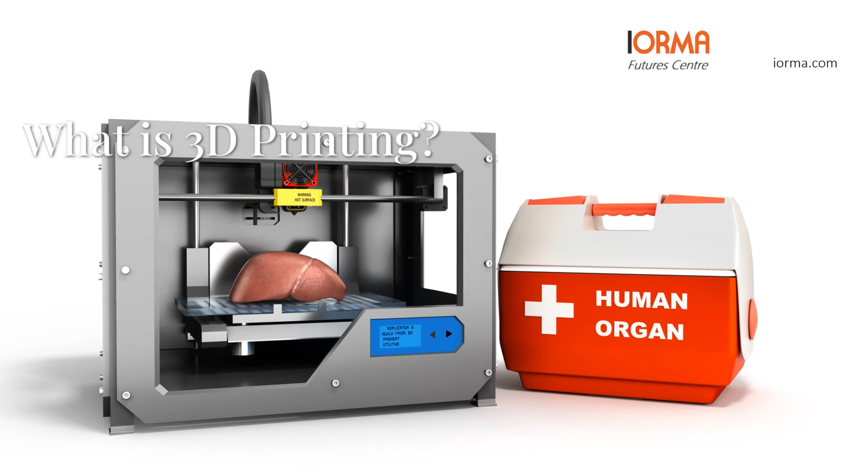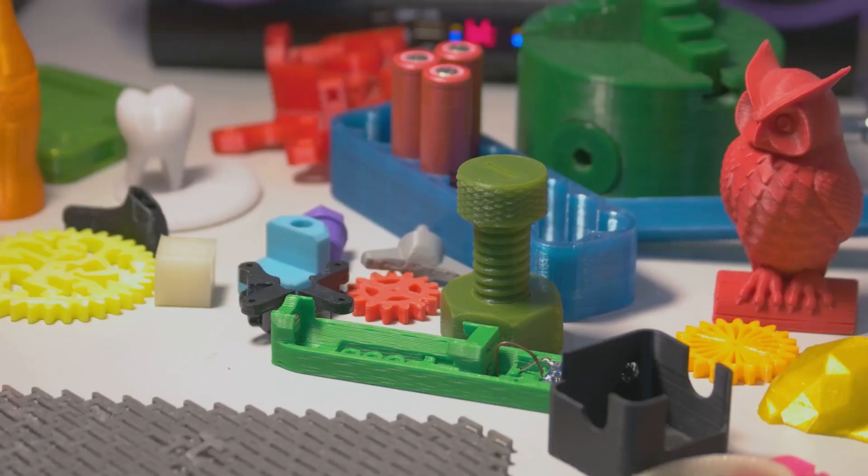Imagine a world where organs are printed on demand, homes are built in days, and astronauts on Mars create their own tools, all thanks to 3D printing. This is not science fiction. 3D printing, or additive manufacturing, is revolutionizing how we make things. Instead of carving objects from blocks, we now build them layer by layer from digital blueprints, reducing waste and unlocking new possibilities. From jet engines to custom shoes, 3D printing is localizing, personalizing, and streamlining production. The power to create is shifting to designers, engineers, doctors, and you. Let's explore how this technology is reshaping industries, economies, and our future.

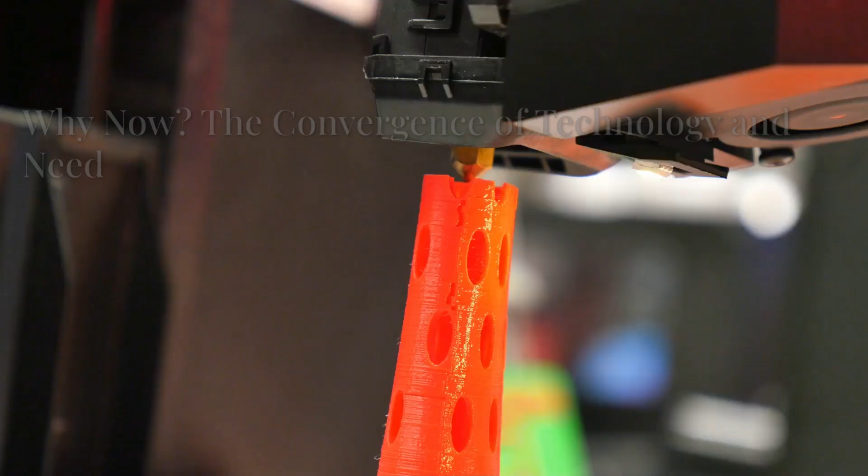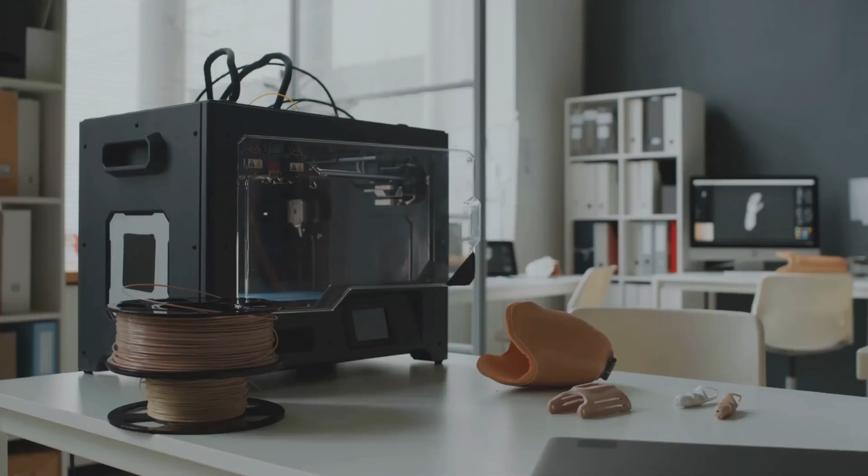3D printing works like a regular printer, but instead of ink on paper, it stacks layers to form solid objects. It starts with a digital design, a CAD file, sliced into thin layers by software. The printer then deposits or solidifies material, building the object from the ground up. Unlike traditional manufacturing, complexity doesn't add cost or time. Materials range from plastics and metals to ceramics and even living cells. This flexibility means 3D printing can tackle challenges across industries. Turning digital ideas into real objects is now just a click away.

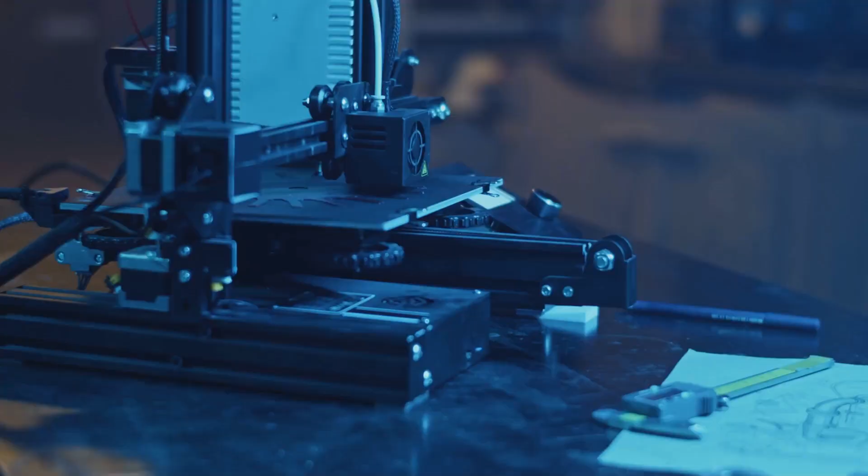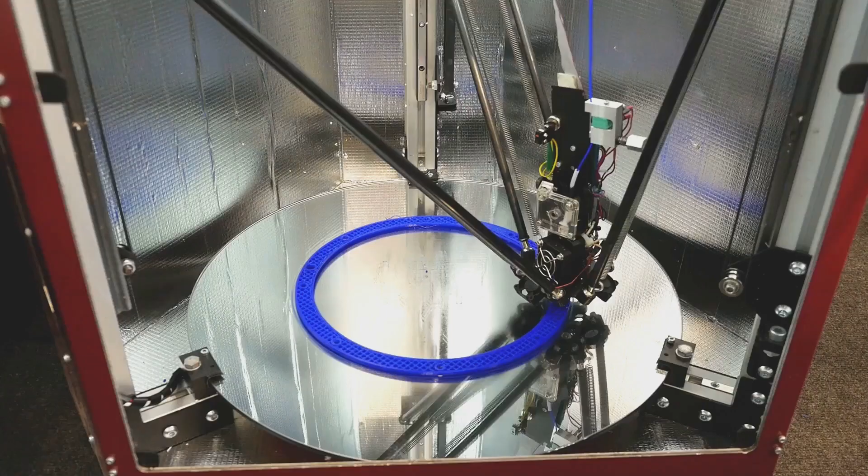3D printing has exploded recently due to faster computers, cheaper printers, and demand for custom, sustainable products. Early machines were huge and expensive, but now anyone can own a printer. Expired patents and open-source innovation have slashed costs. Today's consumers want personalized goods, and industries need greener, more resilient supply chains. 3D printing answers both calls, cutting waste, reducing transport, and enabling local production. Recent global disruptions have only accelerated this shift. The technology is ready and the world needs its solutions now.

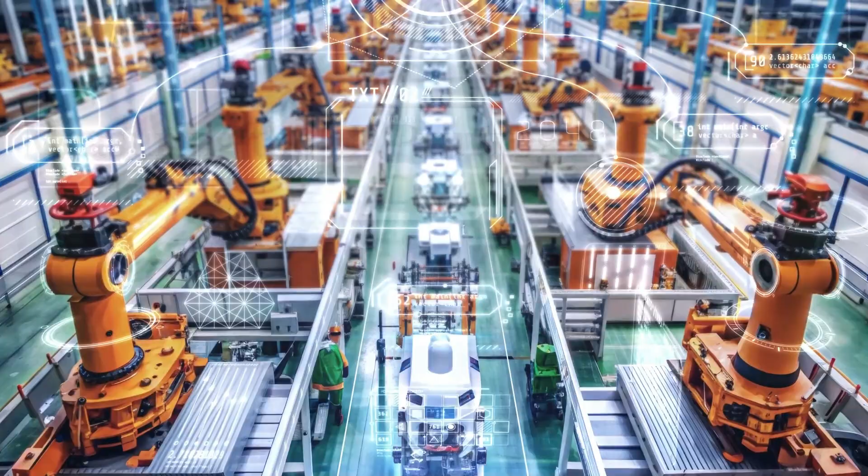Manufacturing is a $13 trillion industry, employing 350 million people worldwide. Mass production has made goods affordable, but relies on fragile global supply chains and creates massive waste. Traditional methods often discard most raw material, up to 90% in some cases. Long-distance shipping adds to pollution and vulnerability. Recent crises have exposed these weaknesses. 3D printing offers a more efficient, local, and sustainable alternative. The need for a new manufacturing paradigm has never been clearer.

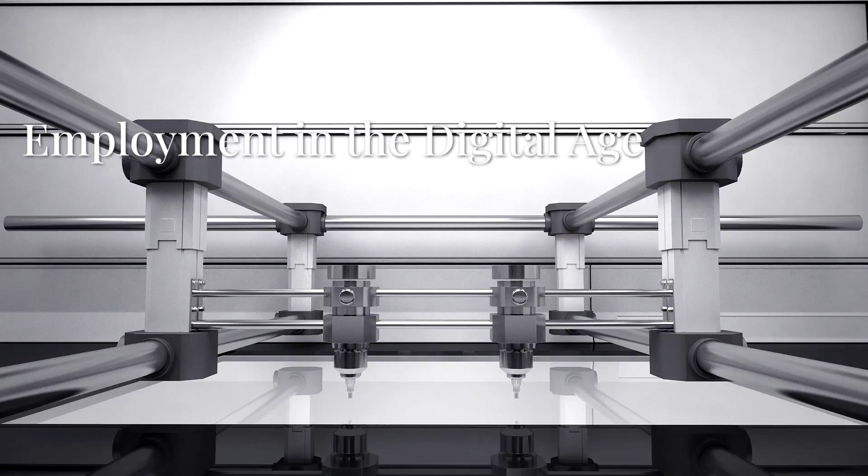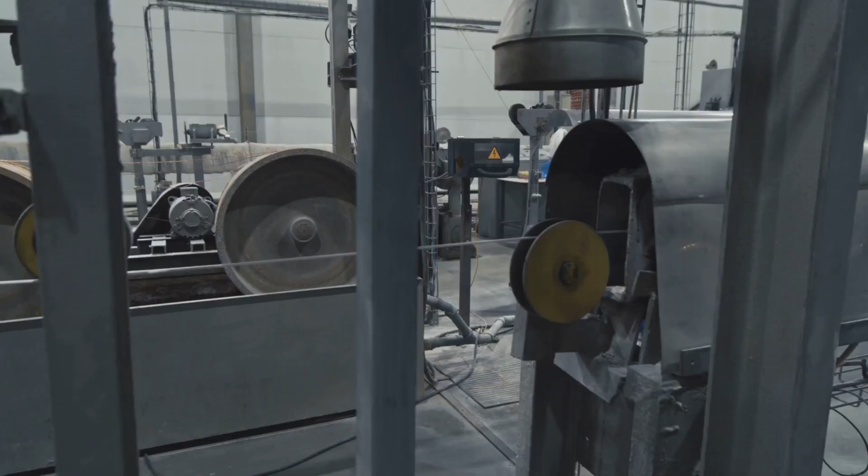The 3D printing industry is worth $20 billion, tiny compared to traditional manufacturing, but growing fast. Its value doubles every few years, driven by breakthroughs in speed, materials, and software. Aerospace, medicine, and automotive sectors are leading the way, inspiring others to follow. Analysts predict the market will top $100 billion within a decade. 3D printing flips the economics, making one unique item cost the same as making thousands. This agility and customization challenge the old mass production model. It's not just a tool, it's a new way to create.

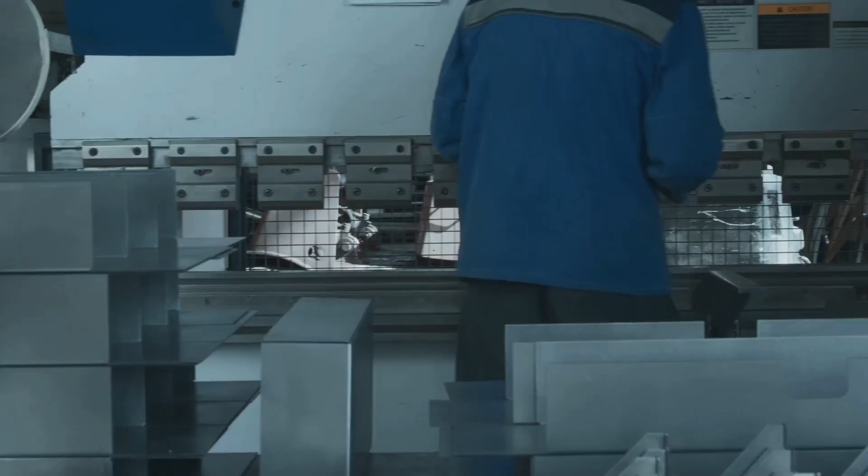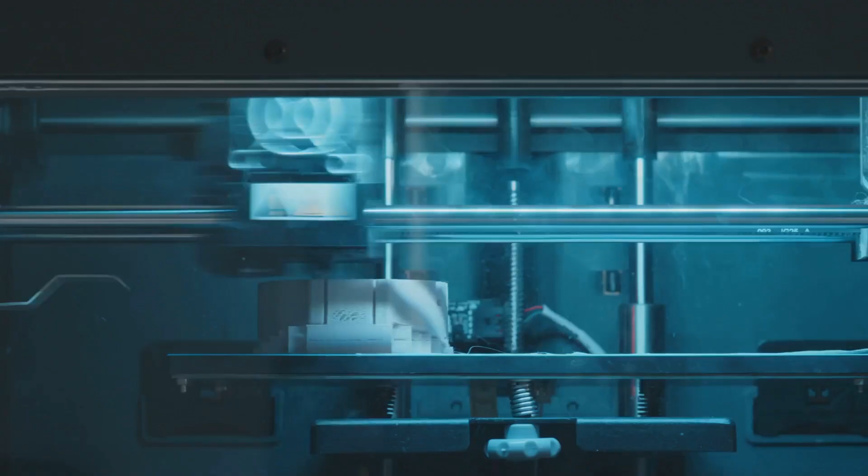Traditional manufacturing employs millions. 3D printing, about 300,000 highly skilled workers. The shift is from manual labor to digital design, engineering, and machine operation. As 3D printing spreads, demand grows for creative, technical, and problem-solving skills. Jobs will change, some lost, many new ones created in digital craftsmanship and sustainable design. Manufacturing could return to regions once lost to cheaper labor as innovation trumps cost. The challenge: retrain and educate workers for this new era. The future of work is creative, digital, and driven by 3D printing.

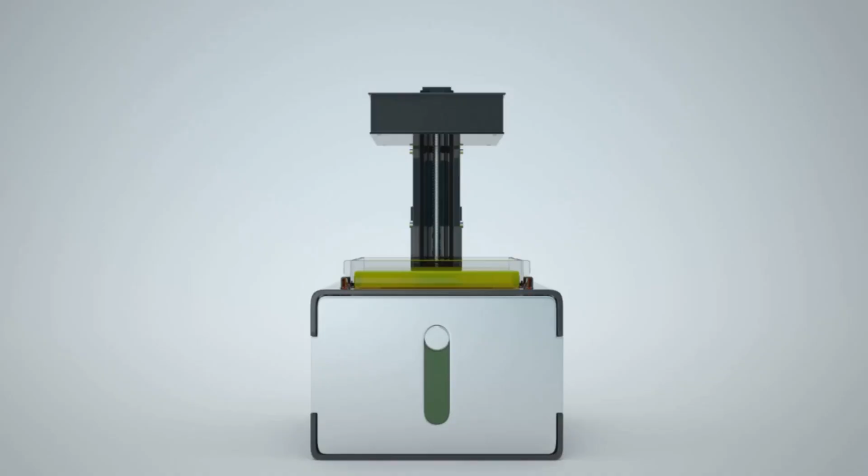The core economic argument for 3D printing is profoundly compelling. It rewrites the rules of production, moving away from the rigid model of the past towards a flexible, localized, and on-demand future. Additive manufacturing inverts economic logic. Complexity has little impact on cost, and there's no need for product-specific tooling. This allows for rapid prototyping, test and refine a new product in hours, accelerating innovation and reducing costs. With 3D printing, companies can simply print parts on demand from a digital file. Ultimately, the economic rationale is about creating a more resilient, efficient, and responsive manufacturing ecosystem.

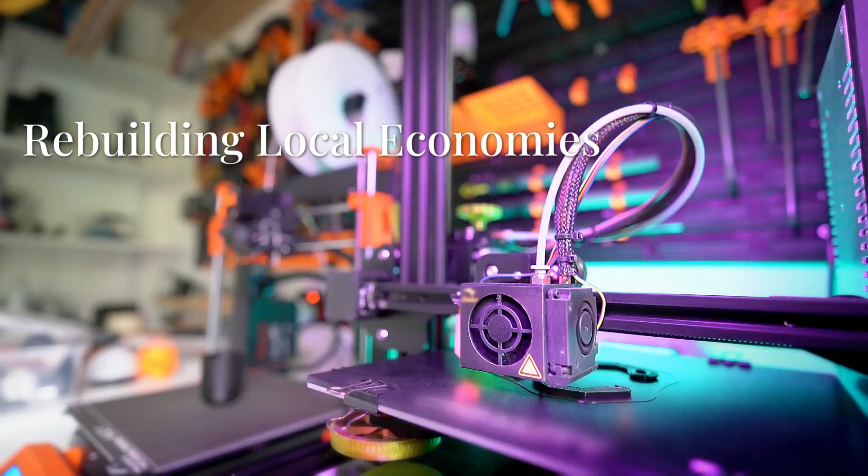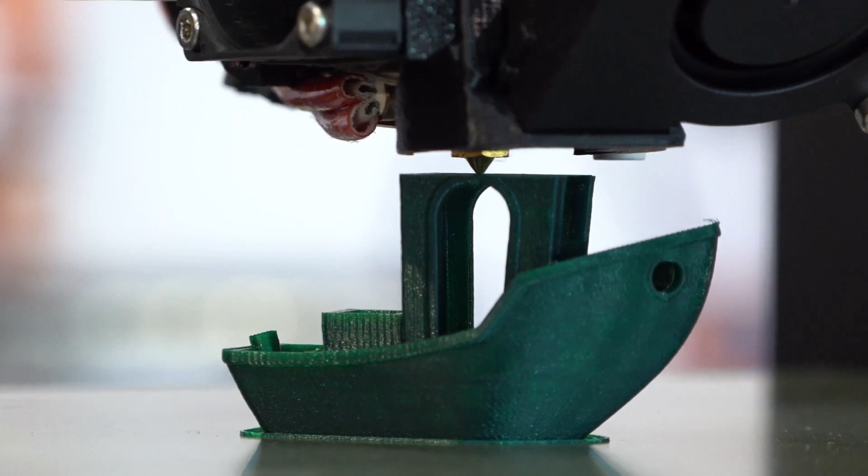Three-dimensional printing dramatically reduces industrial waste. For centuries, manufacturing has been subtractive. We cut, drill, and carve away material we don't need. Additive manufacturing turns this paradigm on its head. Instead of removing material, it adds it, one layer at a time. The amount of raw material consumed is almost identical to the amount in the finished product. This shift represents one of the greatest leaps towards sustainable manufacturing, promising to conserve resources. Companies can slash their production costs, making them more competitive. The environmental impact is transformative. Three-dimensional printing significantly lightens humanity's industrial footprint.

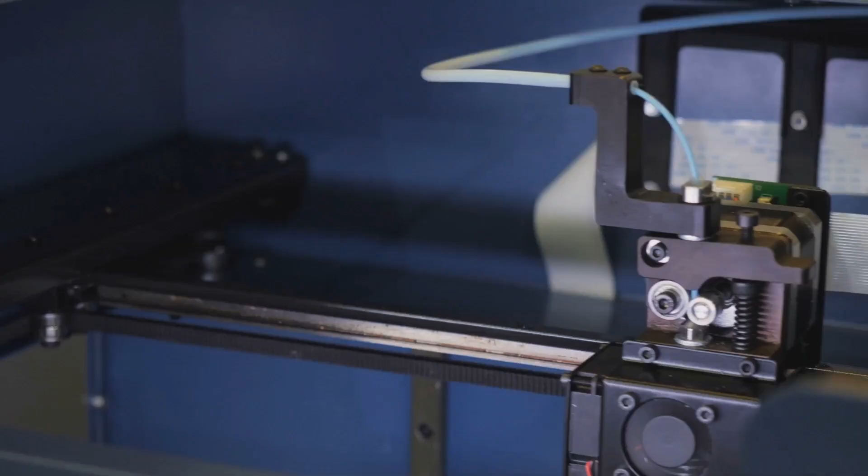Additive manufacturing shifts away from centralized production. Three-dimensional printing dismantles geographic necessity, bringing the factory directly to the community. This decentralization can revitalize local economies, empowering small businesses to become manufacturers.

This democratization of production can foster local innovation, creating bespoke products and keeping wealth circulating locally. This shift creates opportunities for high-skilled jobs within communities. It fosters economic resilience and self-sufficiency. Global knowledge combined with local production builds a more prosperous future.

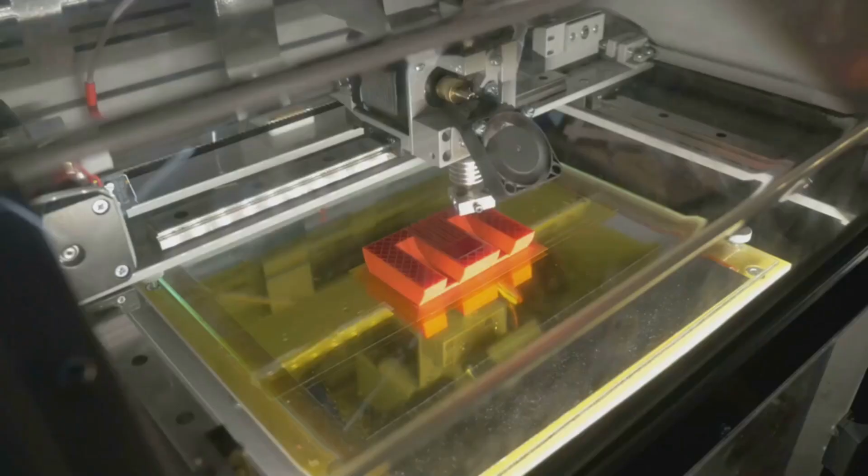Traditional manufacturing relies on intricate globe-spanning supply chains, but they are vulnerable and costly. Three-dimensional printing offers a solution by moving manufacturing closer to consumption. Instead of shipping goods, we can transmit digital files instantly. This reduces carbon footprint and creates economic resilience.

A decentralized network provides a robust alternative to supply chain disruptions. Digital libraries replace physical inventory, freeing capital and reducing waste.

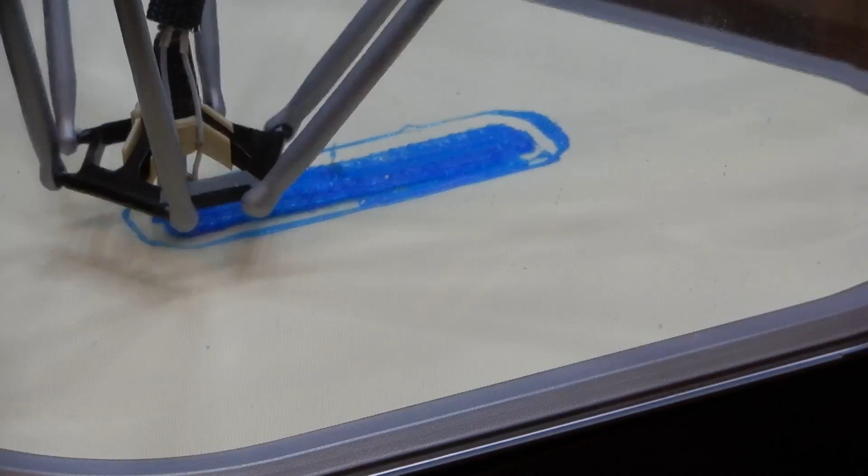Three-dimensional printing enables a circular economy, a model that involves sharing, reusing, repairing, refurbishing, and recycling materials. Materials are kept within the economy to be used again, creating further value. Additive manufacturing champions the right to repair. Replacement parts can be easily and cheaply produced, extending the life of products.

Three-dimensional printing is revolutionizing the use of recycled materials like plastics and metals. Plastic waste can be transformed into raw material for printing new consumer goods. By creating a direct, high-value use for recycled materials, three-dimensional printing provides an economic incentive to improve recycling.

The technology allows for the design of products that are easier to recycle because parts can be made from a single material. This vision of a circular economy is being made a practical reality by three-dimensional printing.

The economic model of the 20th century was built on mass production, making millions of identical items to drive down costs. This one-size-fits-all approach was efficient, but it often failed to meet the specific and diverse needs of individuals.

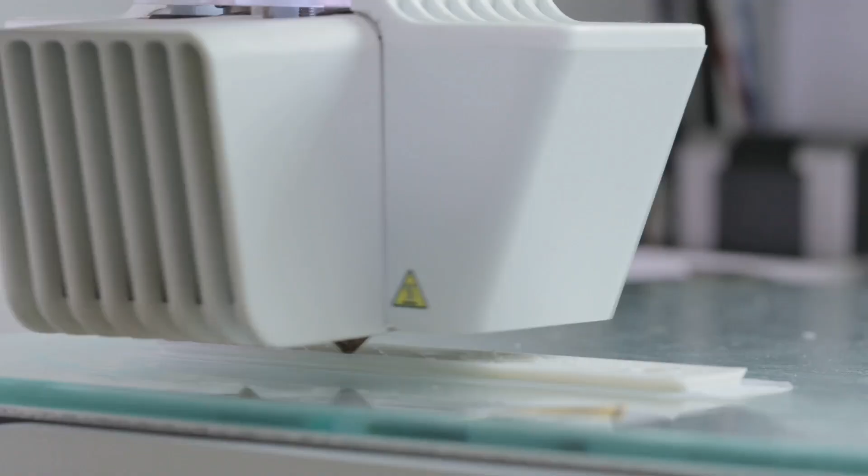Three-dimensional printing fundamentally overturns this model, ushering in the era of mass customization. Because the technology does not require any physical molds or tooling, the cost of producing one unique item is the same as producing the first of 1,000 identical ones.

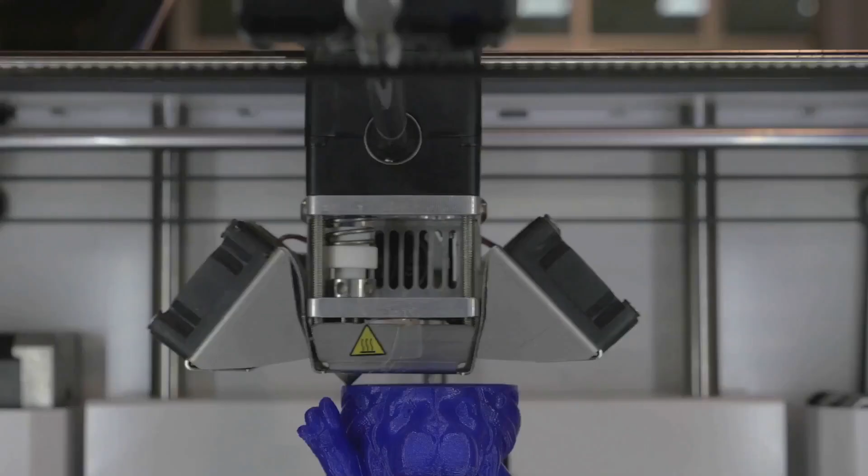This economic reality unlocks the ability to tailor products to the precise specifications of each individual customer, without the prohibitive costs traditionally associated with bespoke manufacturing.

This capability has transformative implications across countless industries. In healthcare, it means prosthetics that are perfectly matched to a patient's anatomy, surgical guides printed from a patient's own scan, and even personalized medicines with dosages tailored to an individual's specific metabolic needs.

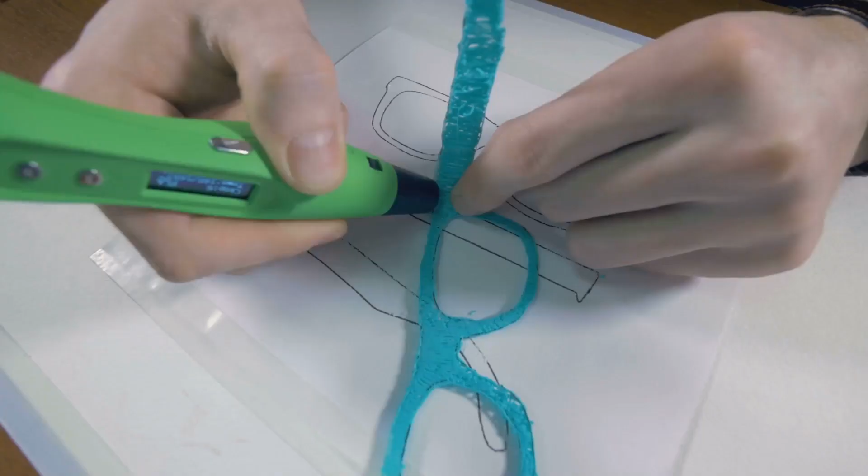In the consumer goods sector, it means footwear designed for your unique gait, eyewear that fits your facial structure perfectly, and products that you can co-design yourself, expressing your own creativity and style. This level of personalization creates products with higher value, greater utility, and a stronger emotional connection for the user.

The on-demand nature of this production model also yields significant economic and environmental benefits by eliminating overproduction. In the traditional retail model, companies must forecast demand, often inaccurately, leading them to produce vast quantities of goods that may never be sold. This results in clearance sales, overflowing outlets, and ultimately, millions of tons of unsold products being sent to landfill or incinerated each year, a colossal waste of resources, energy, and capital.

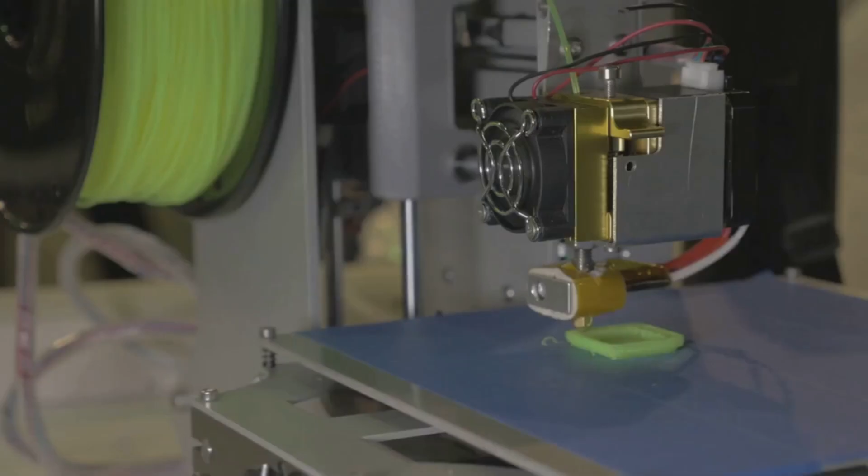With three-dimensional printing, products are only made once an order has been placed, ensuring that every single item created has a guaranteed home. This shift from speculative production to on-demand manufacturing is a powerful force for sustainability.

It ensures that precious raw materials are not wasted on unwanted goods and eliminates the environmental impact of disposing of them. For businesses, it removes the financial risk of holding inventory and the costly problem of managing returned goods.

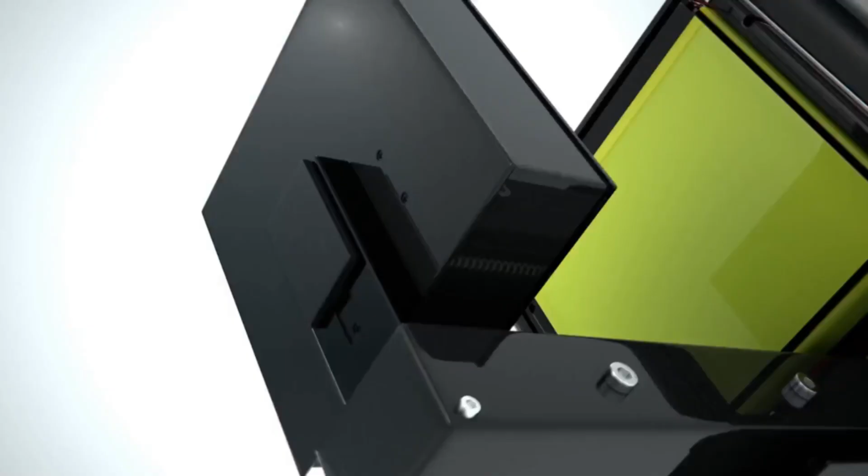If a customized product is not quite right, the digital file can be easily adjusted and a replacement printed, with the original item often being recycled directly into new material. This economy of one is therefore not just about personalization. It is about creating a more intelligent, responsive, and profoundly less wasteful system of production.

Imagine a world where your shoes fit perfectly from the very first step, and your clothes are not just off the rack, but designed precisely for your body and your taste. Thanks to the marriage of 3D design and 3D printing, this vision is rapidly becoming reality.

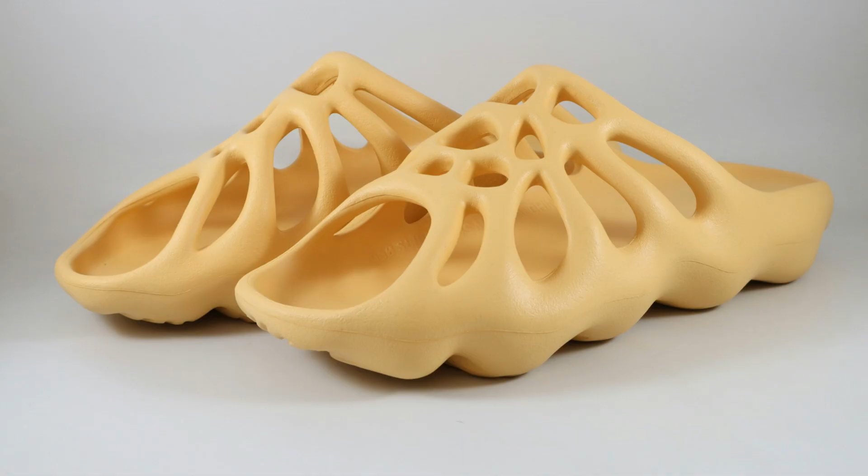In the evolving landscape of fashion, these technologies are empowering designers and consumers alike. Custom-fit trainers, individually tailored dresses and accessories with intricate, never-before-seen patterns are now possible, each piece as unique as the person who wears it. No longer constrained by mass production, creativity flourishes, giving rise to styles that truly reflect personal identity.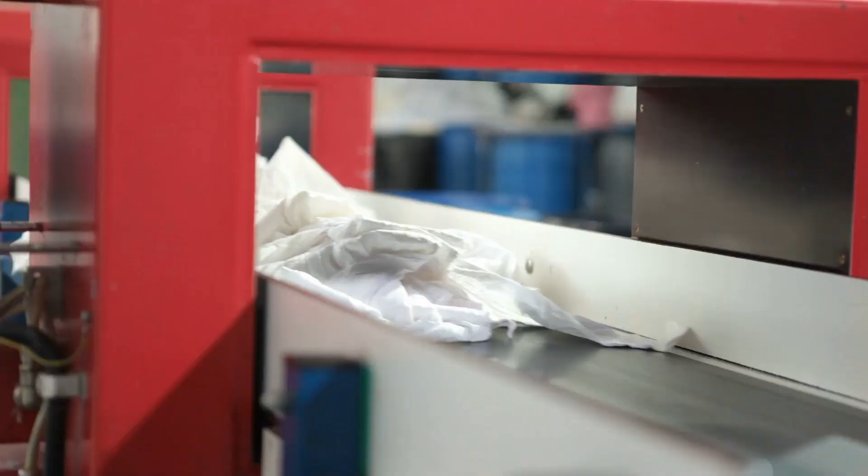But the transformation goes far deeper than aesthetics. Traditional fashion manufacturing is notorious for its excess, offcuts, surplus stock, and unsold garments piling up in landfills. 3D printing flips this script. By producing items on demand and to exact specifications, it significantly reduces material waste. Every thread, every filament, every drop of dye is used with purpose, supporting a move towards waste-free circular fashion.

This shift isn't just about looking good, it's about doing good. Sustainable materials, efficient processes, and localized production chains lower the industry's environmental footprint. The result? A fashion future that's not only more creative and personal, but also kinder to our planet. As we continue to weave technology into the fabric of our lives, 3D printing is ensuring that the next big trend is sustainability itself. Fashion is being redefined, one layer, one design, one perfectly fitting piece at a time.

Section 2: Building the Future, Construction and Sustainable Housing.

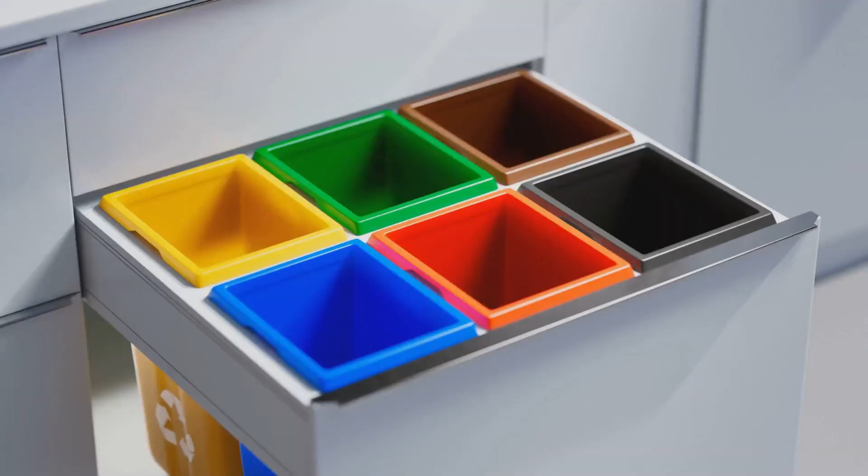The construction industry is on the verge of a radical transformation. Three-dimensional printing is poised to change all of that. Imagine erecting the walls of a house in just a matter of days. It's actually happening right now in projects across the world. This technology offers a powerful solution to the global housing crisis, making housing more affordable and accessible. Additive manufacturing can create complex curves and organic shapes with no additional difficulty or cost. Crucially, this method is a gateway to more sustainable building practices, laying the foundations for the sustainable cities of tomorrow.

Section 3: Reaching for the skies, aerospace and defense.

In the demanding worlds of aerospace and defense, every gram matters. Lighter aircraft are more fuel efficient and can carry heavier payloads. Three-dimensional printing has shattered traditional constraints, enabling the creation of strong and lightweight components. Major aerospace companies are now 3D printing thousands of parts, from brackets to turbine blades. This leads to safer, more reliable aircraft that consume less fuel and reduce environmental impact.

In the defense sector, field deployable printers can manufacture spare parts on demand, revolutionizing military readiness. Three-dimensional printing is also indispensable for space exploration, enabling astronauts to print tools and habitats using local materials. It's helping us reach for the skies.

Section 4: The Automotive Evolution, Driving Towards Digital Manufacturing.

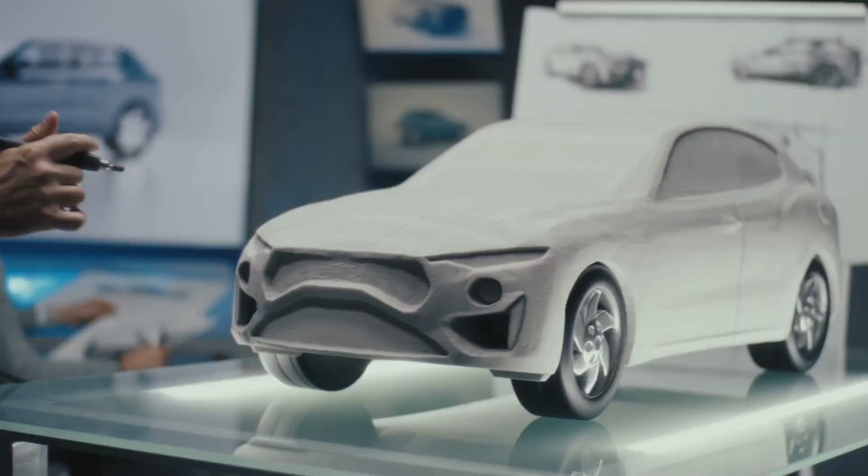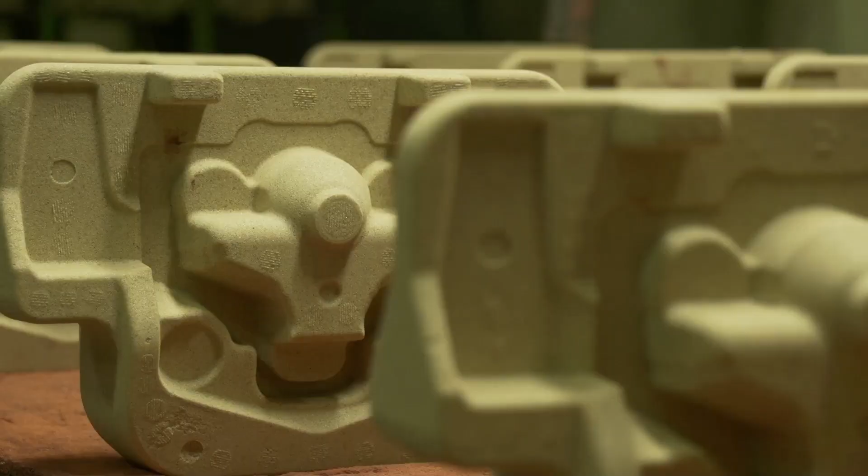The automotive industry is undergoing a profound evolution, and three-dimensional printing is a key catalyst. Additive manufacturing provides the agility the industry needs, starting with design. Automakers can now three-dimensionally print full-scale concept models and functional prototypes in days. Engineers use three-dimensional printing to create custom tools for the assembly line itself. We are seeing three-dimensional printing move into the final vehicles themselves.

More importantly, it is revolutionizing the market for spare parts. Car companies can maintain a digital catalog of parts and print them on demand. This could lead to vehicles that are not only cheaper and faster to produce, but also safer and more fuel efficient, driving the automotive industry towards a more agile, customized, and digitally driven future.

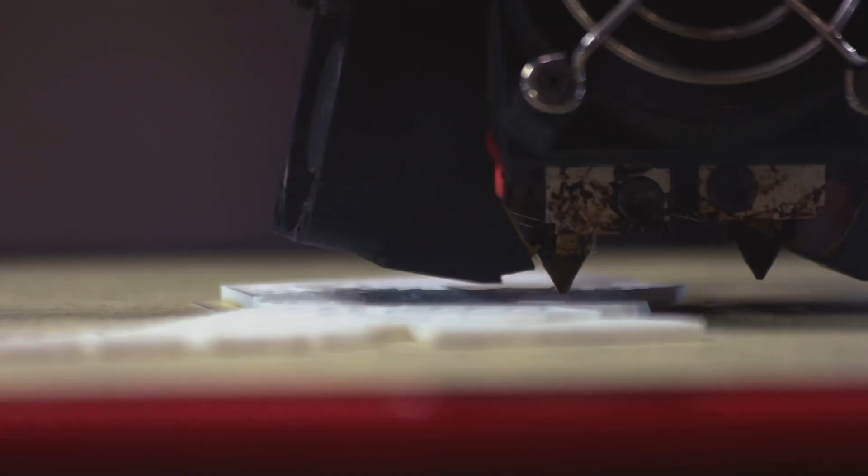Three-dimensional printing in the culinary world is a rapidly growing field. Food printing is used by chefs to create intricate food designs. It also offers a solution for personalized nutrition, tailoring meals to individual needs. This technology promotes sustainability and reduces food waste by utilizing discarded ingredients. The vision is a smart kitchen where a food printer prepares balanced meals based on your needs. It empowers individuals to take control of their health in a personalized way. Food printing gives us a glimpse of a future where food is creative, sustainable, and designed for our well-being.

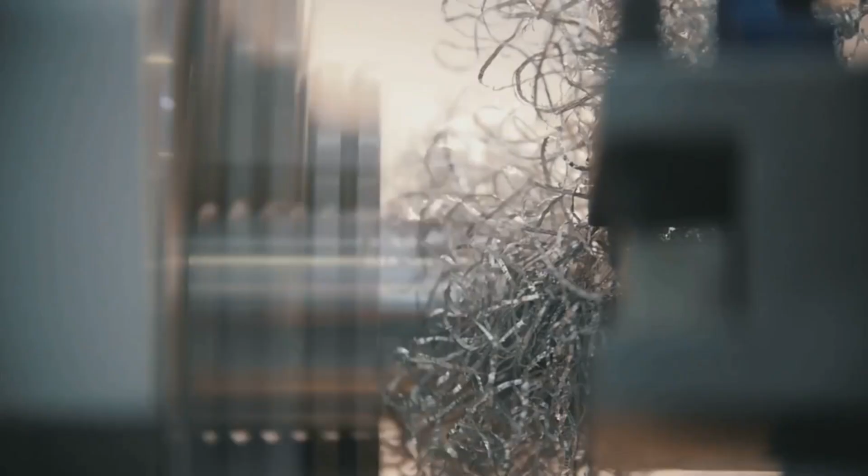When 3D printing began, it was largely associated with plastic. Today, the palette of printable materials is diverse and growing. We can now print with industrial-grade metals, opening a new frontier for manufacturing, creating strong parts for aerospace, automotive, and medical implants. The innovation doesn't stop with metals. We're seeing advanced ceramics, transparent glass, and even natural materials join the revolution. Perhaps most astonishingly, we are printing with food. This versatility is key to the technology's widespread adoption. The potential applications will only continue to multiply.

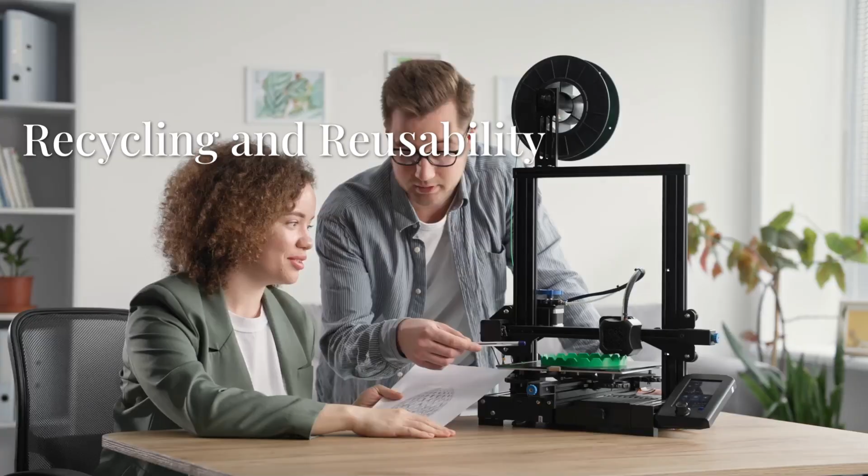At the very heart of invention lies the prototype. It turns a concept into a tangible object. Three-dimensional printing has shattered the bottleneck of traditional prototyping, unleashing innovation. Designers can now go from digital design to physical prototype in hours, revolutionizing development. This creates a fast-paced cycle of designing, printing, and testing. This speed and affordability encourages a culture of fearless innovation.

This ability to fail fast, learn quickly, and iterate relentlessly is the engine of modern innovation. It leads to genuinely better products. The power of the prototype, now unlocked for all, is a catalyst for a more innovative world.

In our quest for a more sustainable future, one of the greatest challenges is our linear take, make, dispose economy, which generates mountains of waste and depletes our planet's finite resources. Three-dimensional printing holds a powerful key to unlocking a more circular economy, where materials are kept in use for as long as possible, recycled, and regenerated into new products.

A new wave of innovation is focused on creating high-performance filaments and powders derived directly from recycled waste, turning a problem into a valuable resource. Imagine a world where the plastic bottles polluting our oceans are collected, processed, and transformed into the raw material for printing everything from stylish furniture to durable footwear.

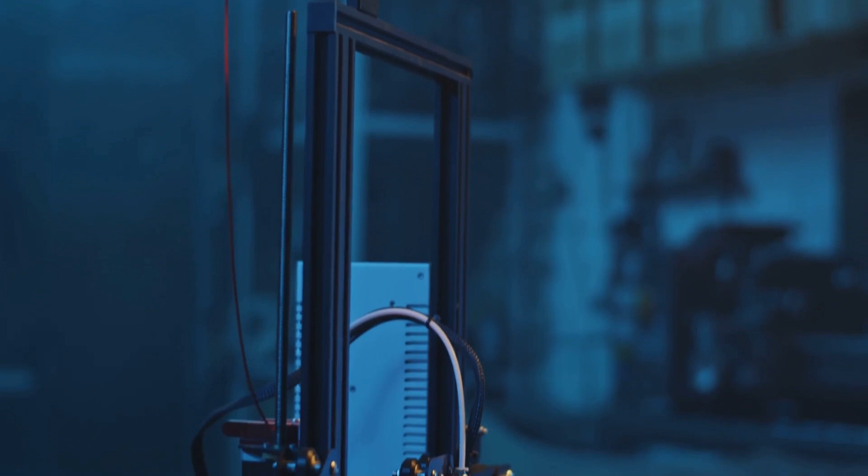This is not a distant fantasy. It is already happening. Companies are developing entire supply chains dedicated to converting post-consumer waste into high-quality three-dimensional printing filaments. It is a tangible way of cleaning our planet while creating useful, desirable products.

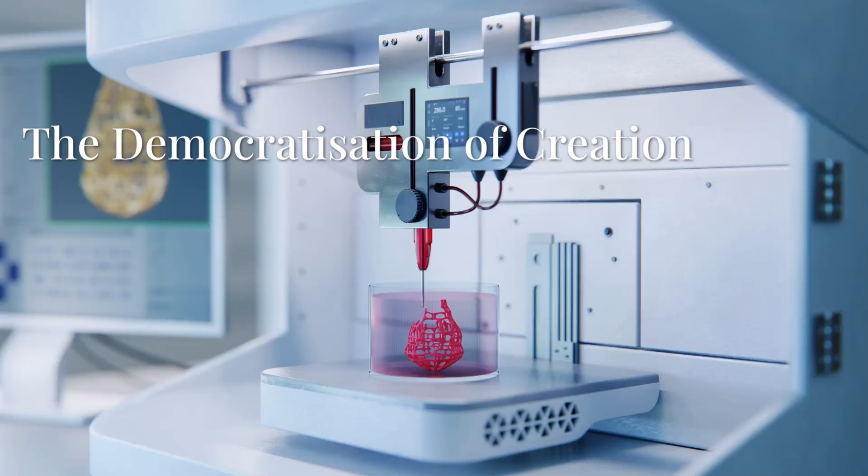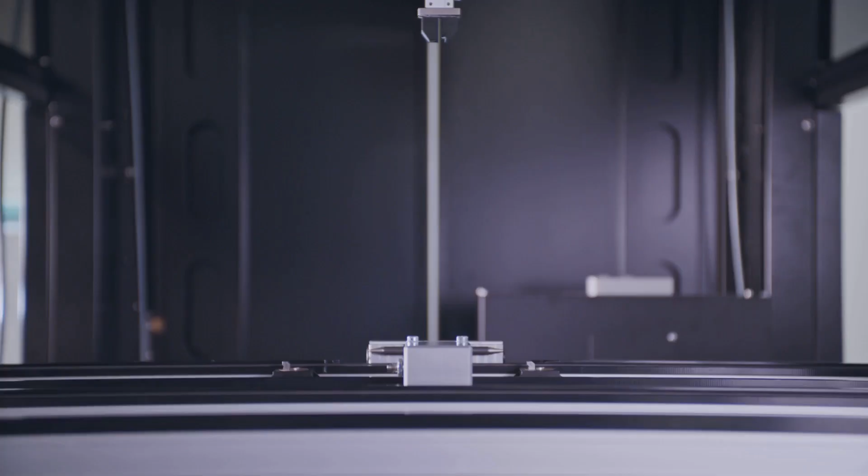As powerful as three-dimensional printing is on its own, its true transformative potential is being unlocked when it is combined with another revolutionary technology, artificial intelligence. This digital synergy is creating a powerful partnership that elevates additive manufacturing from a simple production tool into an intelligent, self-optimizing system. AI is being integrated into every stage of the printing process, from the initial design of an object to the final quality control, pushing the boundaries of what is possible in terms of complexity, efficiency, and reliability, creating a virtuous cycle of constant improvement.

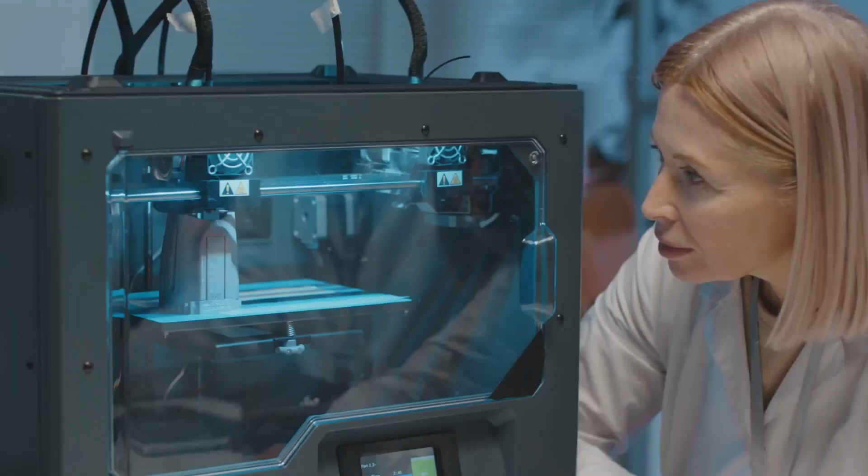One of the most exciting applications of this partnership is in generative design. Here, an engineer does not draw a part. They simply describe the problem to an AI. They input the parameters, like the size constraints, the forces it must withstand, and the material to be used, and the AI algorithm explores thousands or even millions of possible design permutations.

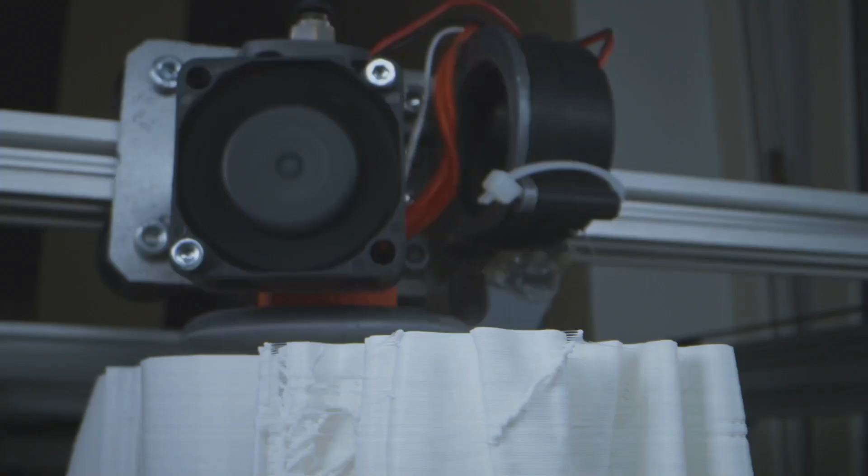It iteratively learns and evolves the shape to create the most efficient, lightweight, and robust solution possible, often resulting in complex, organic-looking structures that a human designer would never have conceived. This collaboration between human ingenuity and machine intelligence is creating a new generation of hyper-optimized parts.

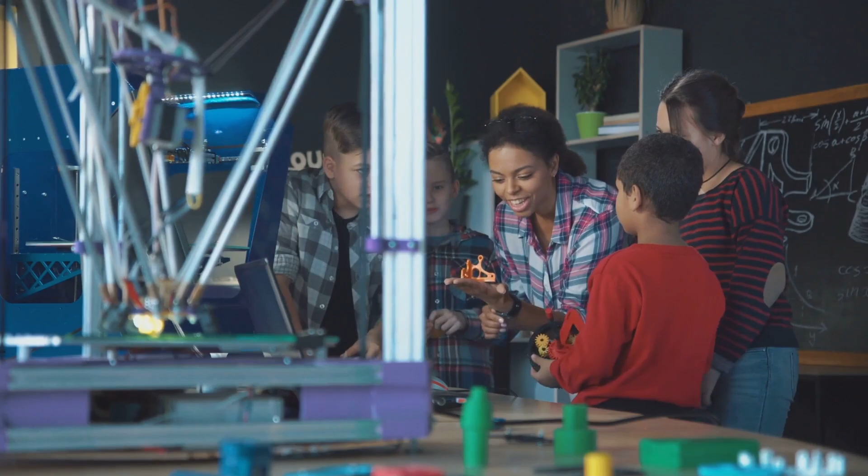AI is also making the printing process itself smarter and more reliable. Machine learning algorithms can monitor a print in real time, using sensors and cameras to detect potential errors before they become critical failures. The AI can identify issues like warping, layer shifting, or nozzle clogs and automatically adjust the printing parameters, such as temperature or speed, on the fly to correct the problem.

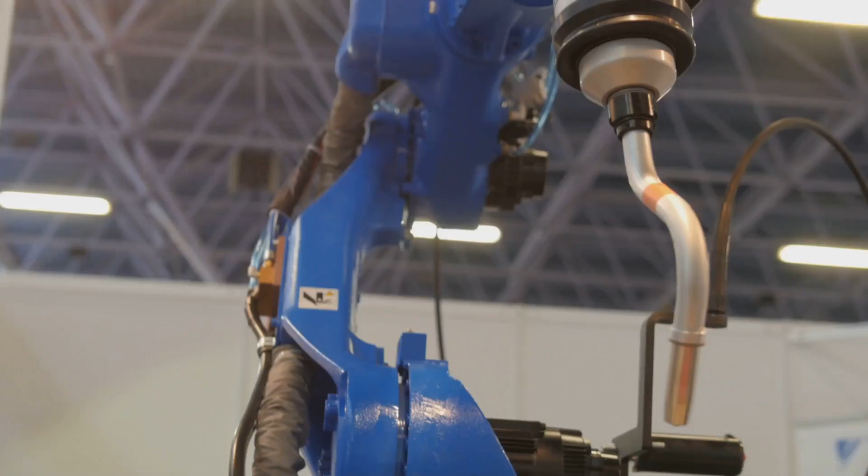This self-correction capability dramatically improves the success rate of complex prints, reduces material waste from failed jobs, and allows printers to operate with less human supervision, paving the way for truly autonomous digital factories of the future.

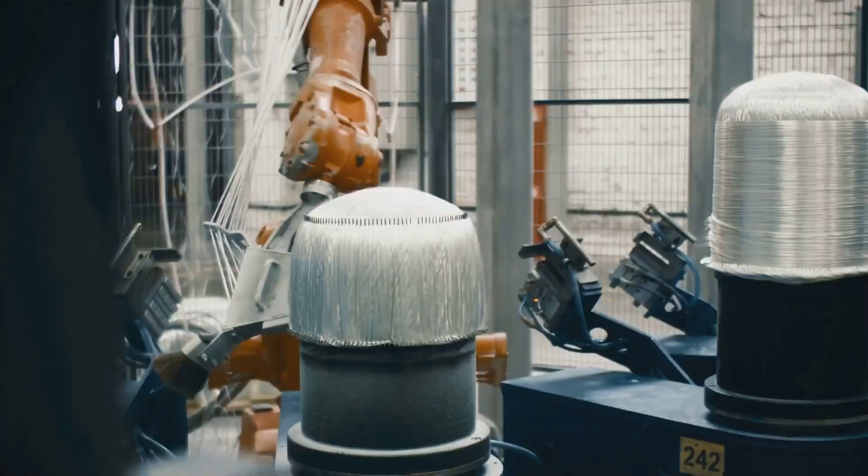This synergy is also accelerating the discovery of new materials. AI algorithms can analyze vast datasets of chemical properties to predict and simulate new polymer or metal alloy formulations with desirable characteristics such as greater strength, flexibility, or heat resistance. This dramatically speeds up the research and development process, which traditionally relied on slow trial-and-error experimentation. By intelligently guiding material science, AI helps create better inks for our three-dimensional printers, expanding their capabilities even further.

The fusion of AI and additive manufacturing is not just an incremental improvement, it is a leap forward, creating a smart, adaptive, and powerful production system for the 21st century.

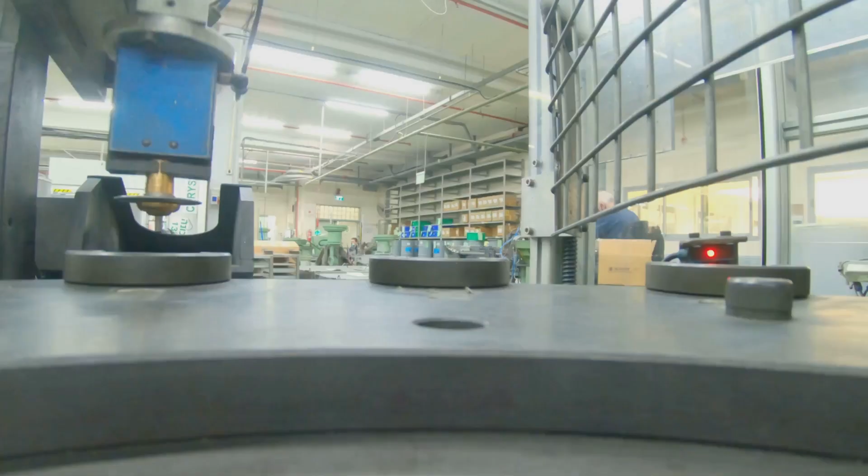As three-dimensional printing becomes more affordable, will these machines become as commonplace as the personal computer? The prospect of a three-dimensional printer in every home signals a shift towards becoming active creators, empowered to produce objects tailored to our needs. It represents the ultimate democratization of creation, putting the power to make directly into our hands. The ability to create what we need, when we need it, could foster a more mindful and sustainable approach to ownership. The personal manufacturing revolution could unleash a new wave of creativity and practical problem solving.

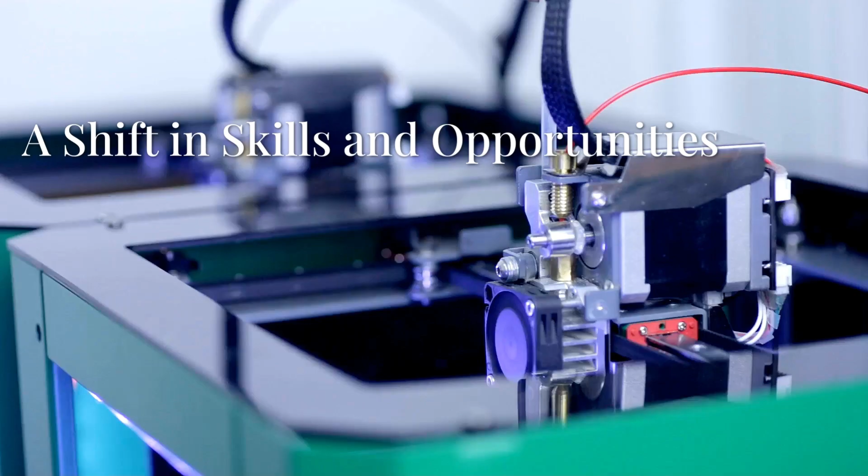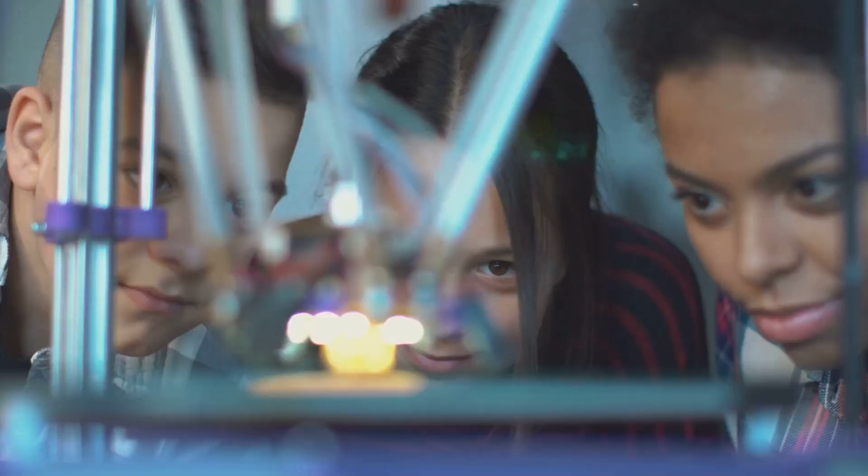To fully harness the potential of this manufacturing revolution, we must equip the next generation with the skills and mindset to thrive in a digitally fabricated world. The inclusion of three-dimensional printing in our educational curricula, from primary schools to universities, is not just a novelty. It is honestly an absolute necessity.

It provides a unique hands-on way to teach core STEM subjects, science, technology, engineering, and mathematics, in a way that is engaging, tangible, and relevant to the real world. When a student can design a solution to a problem on a computer, print it out and hold it in their hands, abstract concepts suddenly become concrete and genuinely exciting. In the classroom, three-dimensional printers transform students from passive recipients of information into active problem solvers.

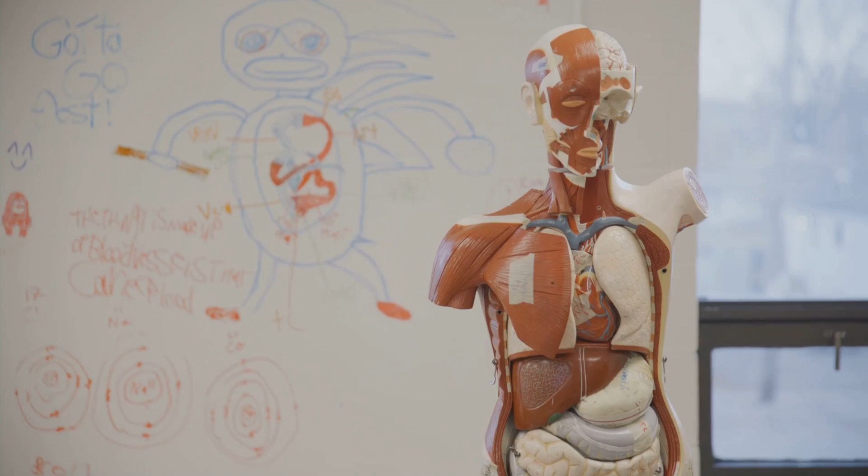A history class could print replicas of ancient artifacts, allowing students to physically interact with the past. A biology class could print detailed models of cells or organs, making complex structures easier to understand. An engineering class can design, print, and test multiple iterations of a bridge or a catapult, learning directly from both success and failure. This process teaches critical thinking, spatial reasoning, and iterative design, essential skills for any future career in the 21st century, regardless of the field.

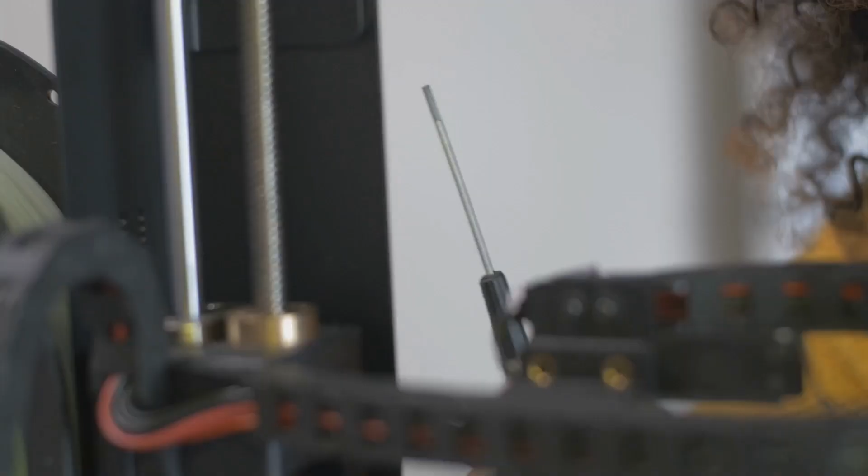This educational shift is crucial for bridging the future skills gap. As industries increasingly adopt additive manufacturing, the demand for a workforce with digital literacy and design competencies will soar. We will need skilled technicians who can operate and maintain the machines, materials scientists who can develop the next generation of printing substances, and most importantly, creative designers who can imagine the innovative products of tomorrow. By introducing these technologies early, we spark curiosity and inspire young people to pursue these high-value career paths, ensuring our economy remains competitive and at the forefront of innovation.

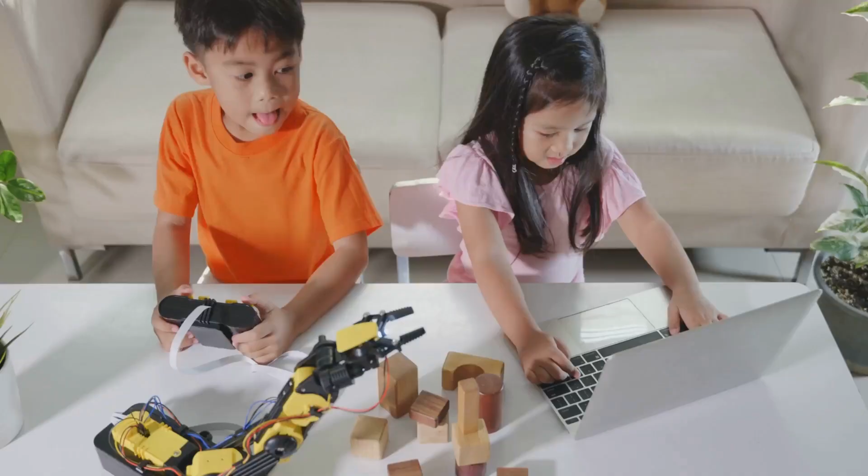Integrating three-dimensional printing into education, much like coding and artificial intelligence literacy, is a fundamental investment in our collective future. It cultivates a generation that is not intimidated by technology, but sees it as a powerful tool for creation and change. It prepares young minds for a world where the boundary between the digital and the physical is increasingly blurred. The students who learn to design and print today will be the architects, engineers, doctors, and entrepreneurs who will build the sustainable, customized, and innovative world of tomorrow. The classroom, therefore, is the true starting point of the three-dimensional printing revolution.

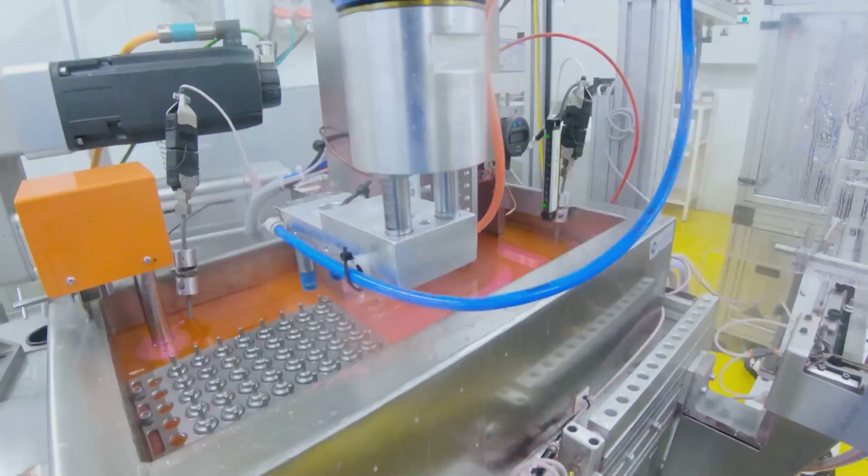The rise of any transformative technology inevitably raises questions about its impact on employment. The integration of three-dimensional printing and automation into manufacturing will undoubtedly change the landscape of work, but this change should be seen not as a threat, but as an evolution.

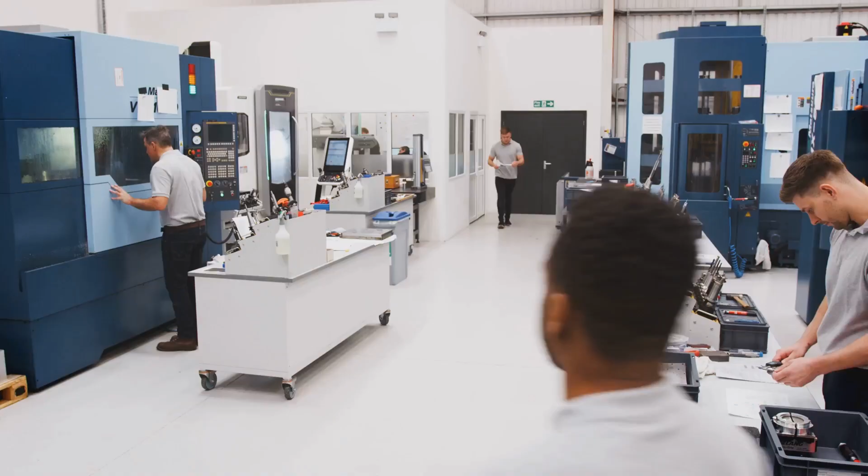While some traditional repetitive manual labor roles on assembly lines may be displaced, a host of new, more skilled and more engaging job categories will emerge in their place. This technological shift is not about replacing humans, but about elevating their role in the manufacturing process, moving from manual execution to creative design, strategic oversight, and complex problem solving.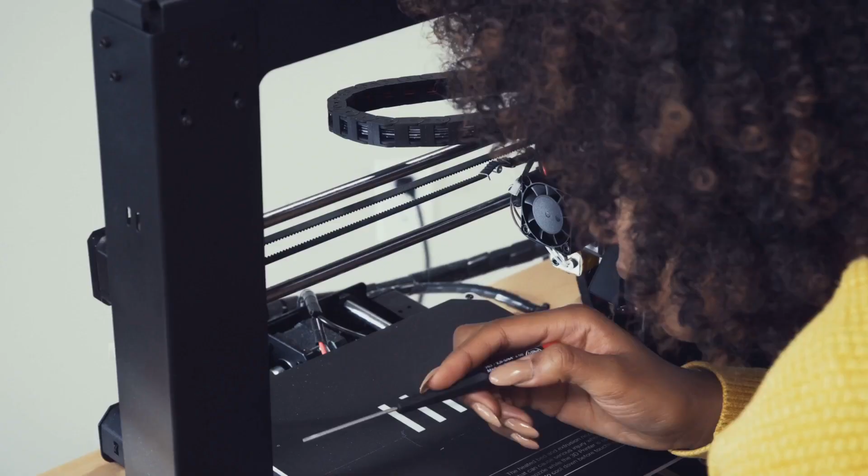The workforce of the future will be defined by digital competencies. There will be a massive demand for three-dimensional designers and CAD specialists who can translate ideas into printable digital blueprints. We will need materials engineers to develop and perfect the ever-expanding palette of printable substances. Skilled technicians will be required to install, operate, and maintain fleets of advanced printers. Furthermore, an entire ecosystem of supporting roles will flourish, from software developers creating the next generation of design tools, to supply chain experts who manage digital inventories and localize production networks.

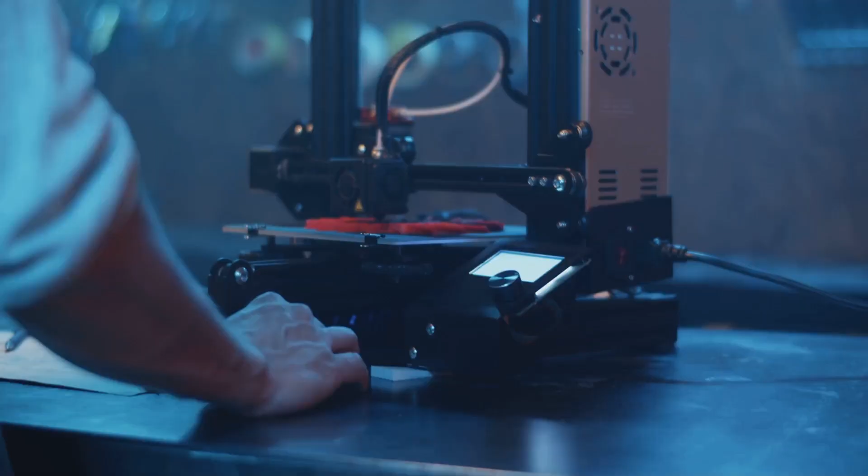This evolution of skills has the potential to create higher value, more fulfilling careers. Instead of performing a single, monotonous task for 8 hours a day, the worker of the future will be a creative collaborator, using technology to solve unique challenges. Their value will lie in their ingenuity, their design flair, and their ability to manage complex automated systems.

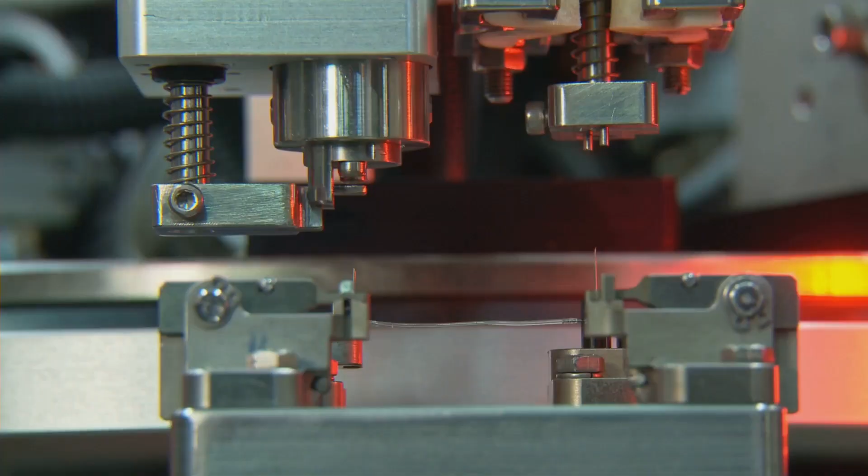This shift could also lead to the reshoring or onshoring of manufacturing jobs, bringing them back to countries where they were previously lost. As the competitive advantage moves from cheap manual labor to skilled innovation and automation, local production becomes economically viable once more, strengthening domestic economies.

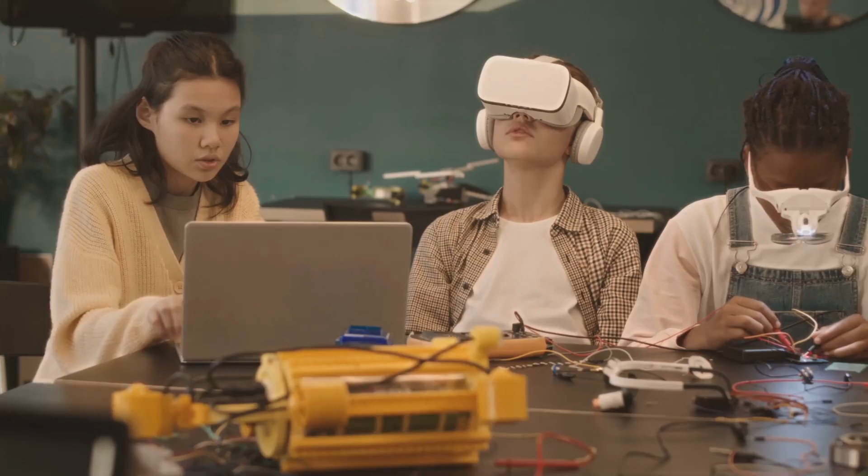The key to navigating this transition successfully lies in a commitment to lifelong learning and workforce development. Governments, educational institutions, and businesses must collaborate to provide accessible training and reskilling programs, ensuring that people have the opportunity to adapt to the new demands of the job market. The history of technology shows that while it disrupts old jobs, it invariably creates new ones that we can scarcely imagine today. The challenge is not to resist this change, but to embrace it, investing in our people to ensure they are ready to seize the exciting opportunities of this new industrial age.

As we look towards the grandest of human ambitions, the exploration and potential settlement of other worlds, three-dimensional printing emerges not just as a useful tool, but as an absolutely essential enabling technology. The sheer cost and difficulty of launching every single tool, spare part and structure from Earth makes long-term sustainable space missions a monumental challenge. Every kilogram launched into space costs thousands of pounds.

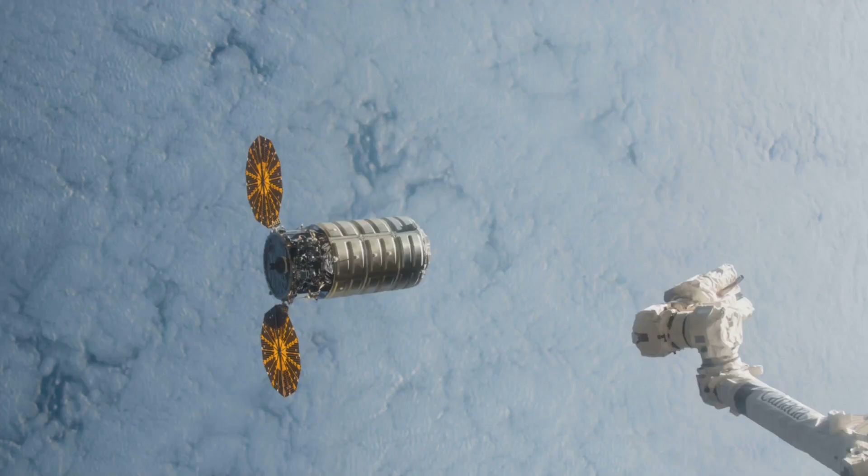Additive manufacturing offers a revolutionary solution. Instead of packing everything we think we might need, we can pack a printer and a supply of raw materials and simply manufacture what we need on demand.

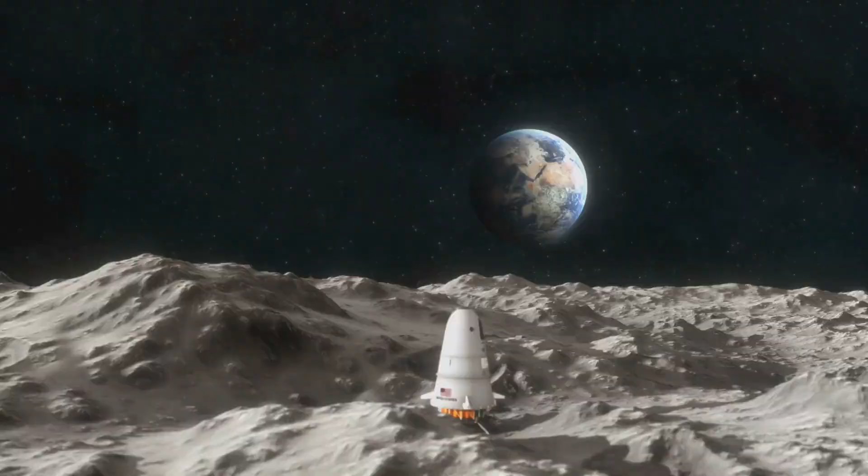This capability is fundamental for establishing a human presence on the Moon or Mars. Astronauts could print custom tools for scientific experiments or replacement parts for critical life support systems, a habitat module, or a rover. This dramatically increases mission resilience and self-sufficiency, reducing the reliance on a fragile multi-million-mile-long supply chain back to Earth. If a component breaks, a new one can be printed within hours using a digital file, a capability that could be the difference between mission success and catastrophic failure when help is months or even years away.

The ultimate vision for space exploration is to use the resources of other celestial bodies themselves, a concept known as in situ resource utilization. This is where three-dimensional printing's potential becomes truly awe-inspiring. Giant autonomous printers could be sent ahead of human crews to build entire habitats, landing pads, and protective structures using local materials like lunar or Martian regolith, the loose dust and rock on the surface.

These printers would mix the regolith with a binding agent to create a concrete-like substance and layer by layer construct the infrastructure needed to support human life, shielding them from radiation and the harsh alien environment.

This technology is the key that will unlock our future as a multiplanetary species. It transforms the challenge of space exploration from a purely logistical problem of transport into a manufacturing opportunity.

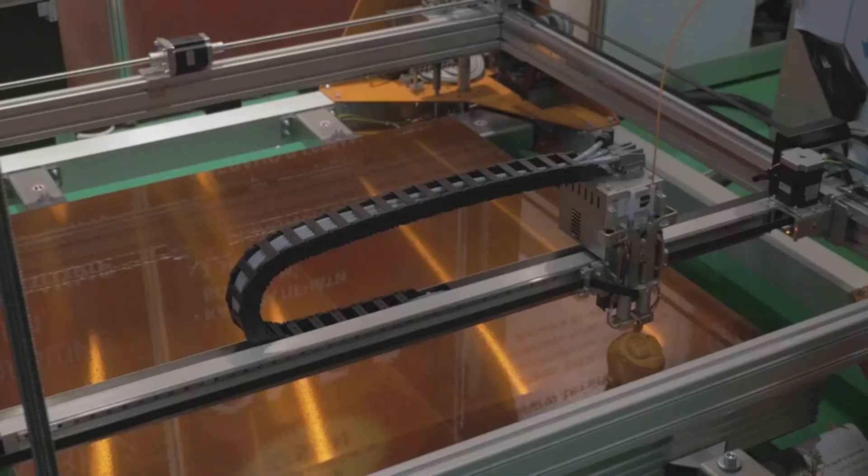On Earth, three-dimensional printing is revolutionizing our industries and societies. In space, it will be the very tool we use to build new worlds. It represents the pinnacle of localized manufacturing, turning the dust of another planet into the foundations of humanity's future. The journey to the stars, it seems, will not just be launched from Earth, but will be printed layer by layer across the cosmos.

We have journeyed from the factory floor to the final frontier, exploring a technology that is fundamentally reshaping our world, layer by delicate layer.

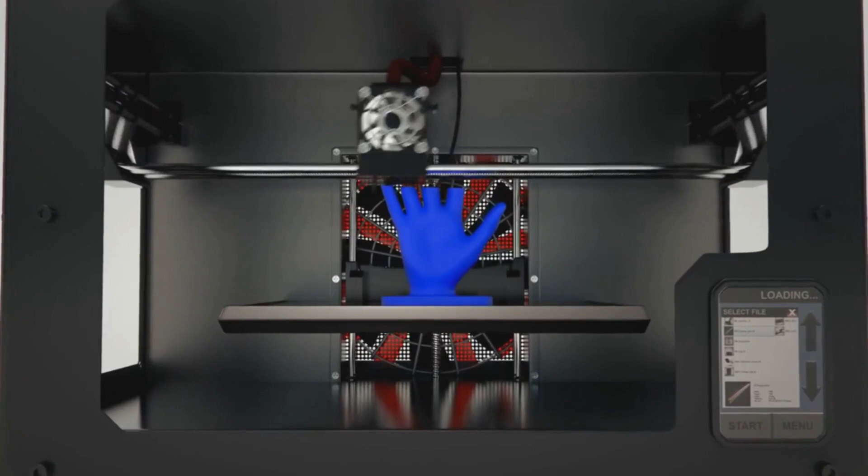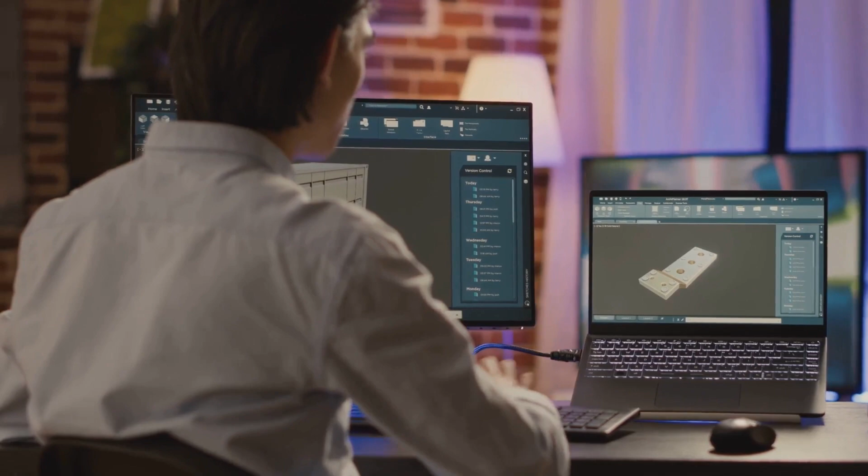Three-dimensional printing, or additive manufacturing, is far more than just a novel way to create objects. It represents a paradigm shift in how we think about production and innovation. It is the dawn of the digital forge, an era where the boundary between a digital idea and a physical reality becomes almost seamless.

This technology empowers us to move into a future of mass customization, where products are designed for the individual, enhancing their value in our daily lives. The implications are profound, promising a more sustainable and efficient future by designing waste out of the system. By enabling localized, on-demand production, we collapse fragile global supply chains and build more resilient local economies.

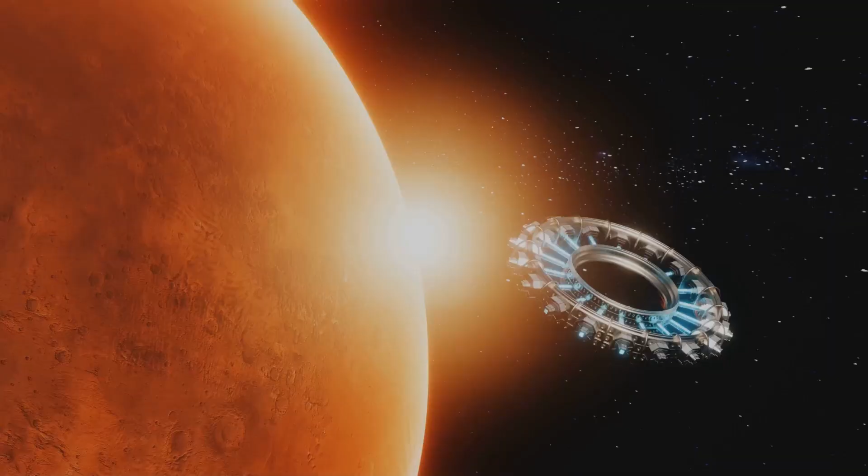This revolution is about people, empowering designers and entrepreneurs with the tools to innovate faster. From printing homes to printing tools on distant planets, three-dimensional printing is a testament to human ingenuity. As the technology becomes faster and integrated with artificial intelligence, the possibilities will only continue to expand.

It will be a world where the power to create is more distributed, heralding a future not just of manufactured goods, but of manufactured opportunity for all. The digital forge is lit, and it is forging our future.

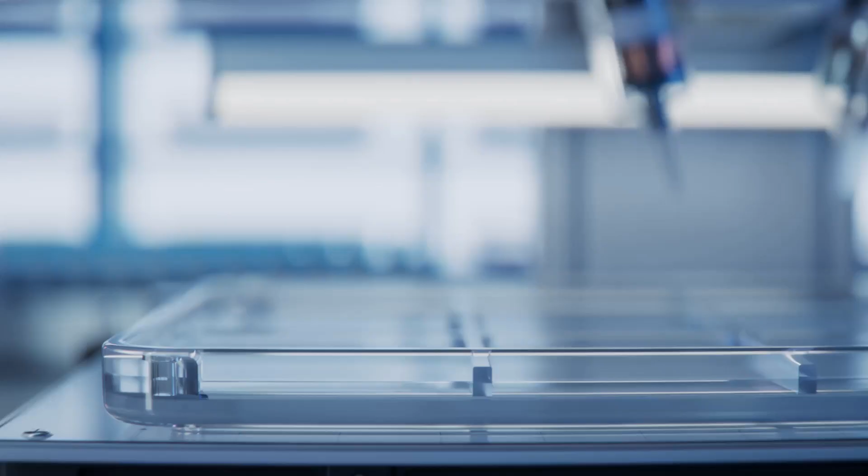Nowhere is the transformative potential of three-dimensional printing more profound than in healthcare. The ability to create perfectly customized objects can be a matter of life, death, comfort, and pain. Additive manufacturing is ushering in an era of truly personalized medicine. We are seeing the creation of prosthetic limbs tailored to exact dimensions, dramatically improving quality of life.

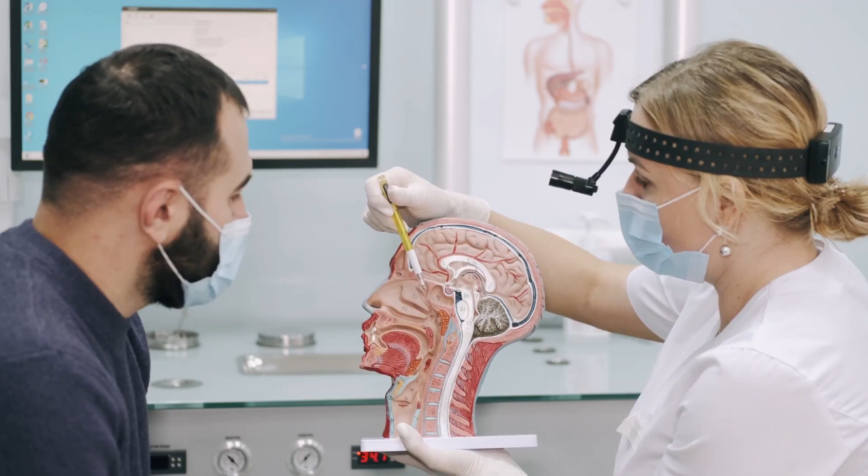Surgeons can now print precise, three-dimensional models of a patient's anatomy, allowing them to plan intricate surgical procedures with unprecedented accuracy. Beyond models and prosthetics, we are on the cusp of bioprinting. Scientists are now using modified three-dimensional printers to build living human tissues. Even the humble pill is being reimagined, allowing for the creation of personalized medications.

Additive manufacturing is fundamentally rebuilding healthcare from the patient outwards, promising a more effective future for all.